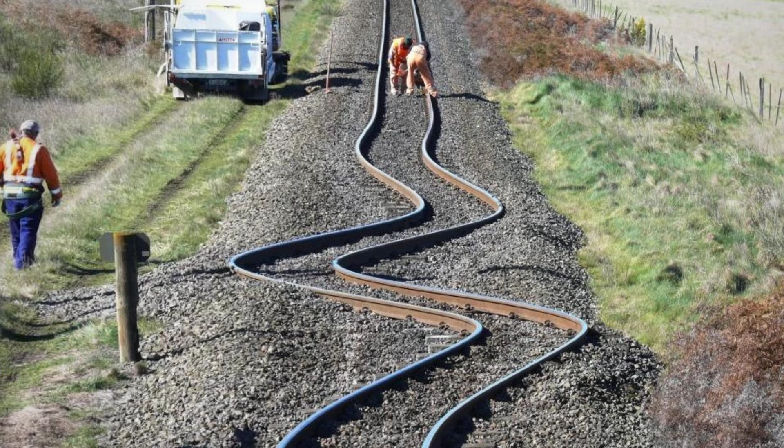Right now, the main railway line between Milan and Lecce is running at reduced speed over a track that deformed by 10 centimeters during the crisis. The A14 motorway connecting Bologna to Taranto is carrying traffic on a single lane in each direction.

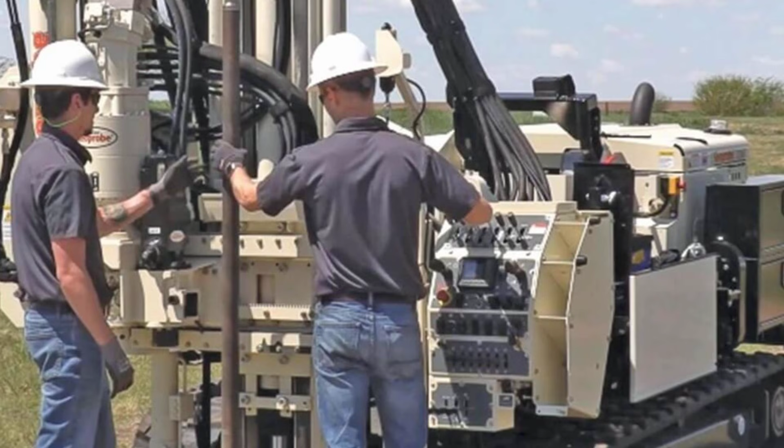And the €40 million project designed to prevent this from happening again has not started. Because after the April reactivation revealed the slope is deeper than anyone had measured, the project needs to be redesigned from scratch before a meter of it is built.

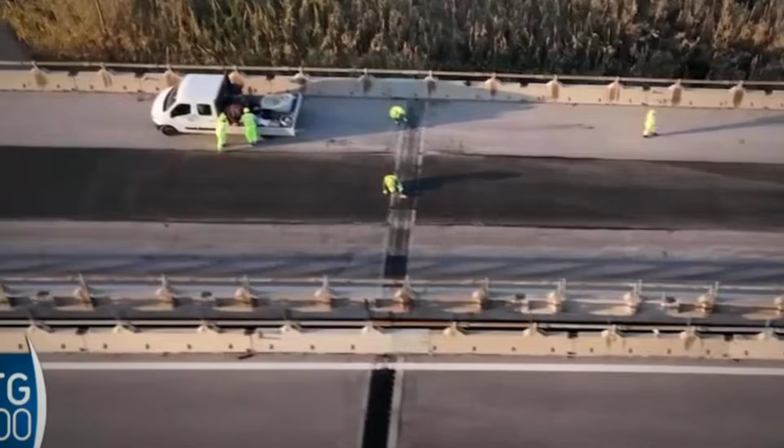The government called it a record time response. Matteo Salvini visited Petacciato, thanked the technicians and workers who had restored Statale, motorway and railway faster than anyone expected. Over 100 people and 40 vehicles had worked through the night.

The A14 reopened April 9th with a single lane. The railway followed the morning after. In 4 days, a corridor that had been severed had a pulse again.

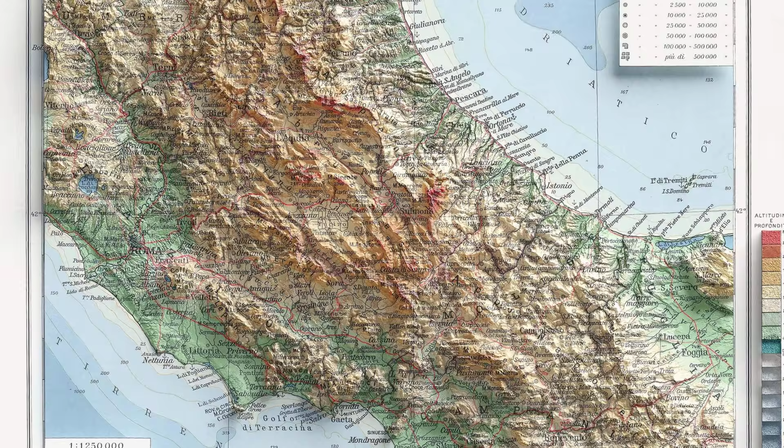The Adriatic corridor is not one infrastructure the way most people picture it. It is 3: motorway, railway, and national road, running side by side through a coastal hillside in Molise that has been moving intermittently for over a century. When the slope reactivates, all 3 close simultaneously. That is not a coincidence of geography.

It is the geography. And the corridor is open right now on the condition that the slope beneath it does not accelerate. The monitoring sensors are measuring it in real time. If the readings change, the closures are automatic.

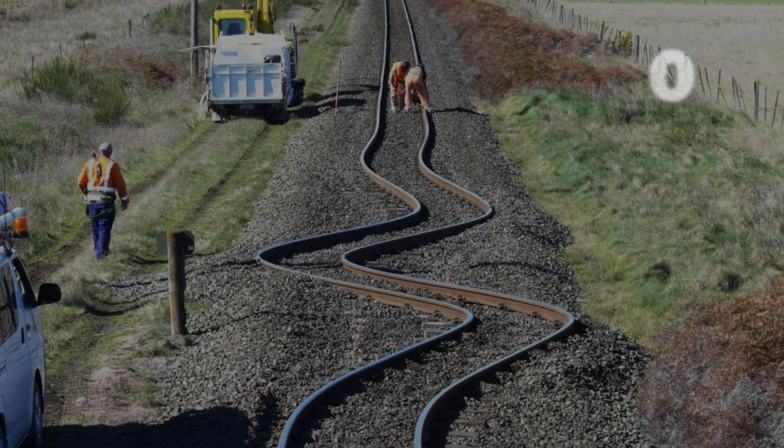Nicola Casagli, president of OGS and one of Italy's foremost landslide scientists, described what the sensors had shown during the crisis: a horizontal displacement of 1.5 meters in the lower sector, where the motorway and railway run, roughly the distance from the driver's seat to the passenger door of a parked car. Vertical movement toward the town reached almost 2 meters.

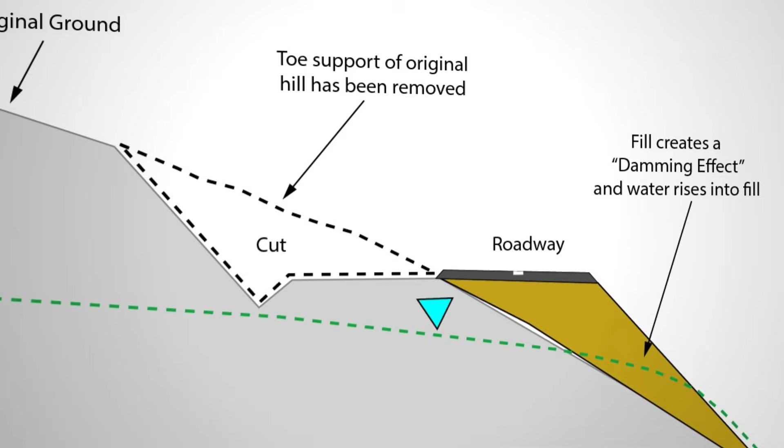And Casagli said something in Petacciato's town hall that changes how this whole story reads. The slope had proved deeper than previously understood. The €40 million mitigation project would need to be aggiornato e riorientato, updated and reoriented, not because it was poorly designed, but because the April reactivation revealed a landslide the pre-existing geological models had not fully captured.

Domenico Racconati, 53, from Bisceglie, has been missing since the Trigno Bridge collapsed on April 2nd. Only his license plate was recovered, snagged on vegetation near a bridge pillar, found on April 3rd. His daughter Angelica asked the state not to stop looking.

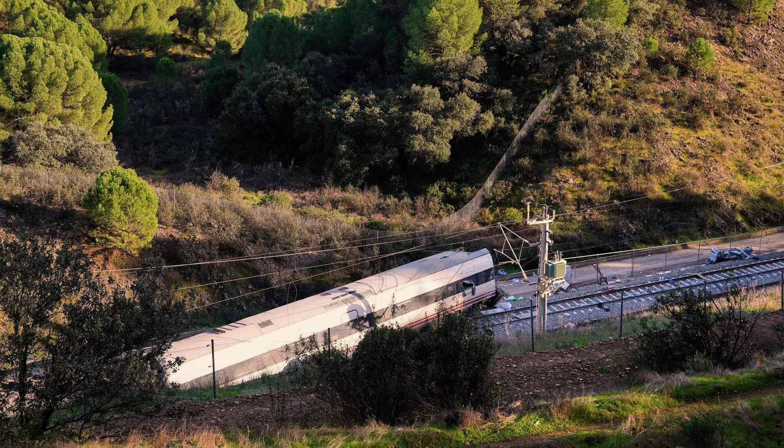On April 7th, at around 9:30 in the morning, the sensors on the A14 embankment registered anomalous movement. The motorway closed first. Within hours, the railway followed. The track monitors had recorded 10 centimeters of deformation. The SS-16 came down simultaneously. The entire corridor went dark in less than 24 hours.

Cyclone Erminio had deposited more than 200 millimeters of rain in the 24 hours before that. Roughly 3 months of average rainfall in a single day. The slope did not fail because of extraordinary rainfall. It reactivated because accumulated water pressure in the clay layers finally exceeded the resistance of the ground. That is what Petacciato does. It has done it at least 9 times in a century.

The landslide front runs for approximately 2 kilometers. Its depth ranges from 25 meters in the upper sector to 80 meters or more in the lower zone. The height of a 25-story building pressing down through the hillside toward the Adriatic.

The €50 million state of emergency declared April 9th covered Abruzzo, Molise, Basilicata, and Puglia. Against that, the €40 million mitigation project, announced by the Molise regional government in 2021 as imminent, tendered in December 2025. Not yet awarded when the slope moved.

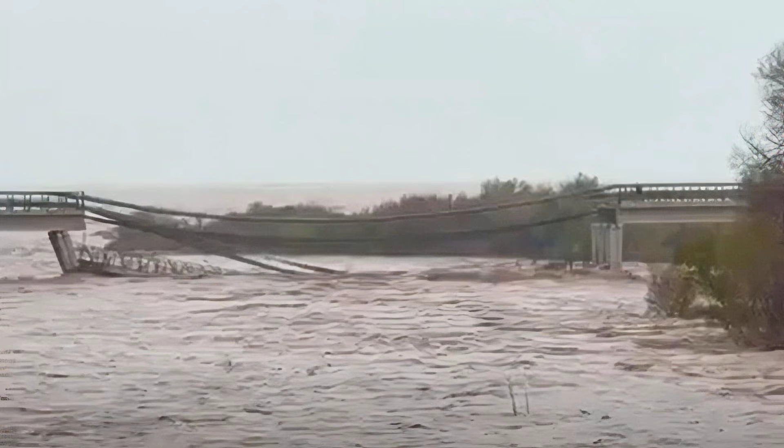The Trigno Bridge will take at least 7 to 8 months to rebuild, according to Fabio Ciciliano, head of civil protection, probably longer. Salvini said it would be restored by the end of the year. He did not specify which year.

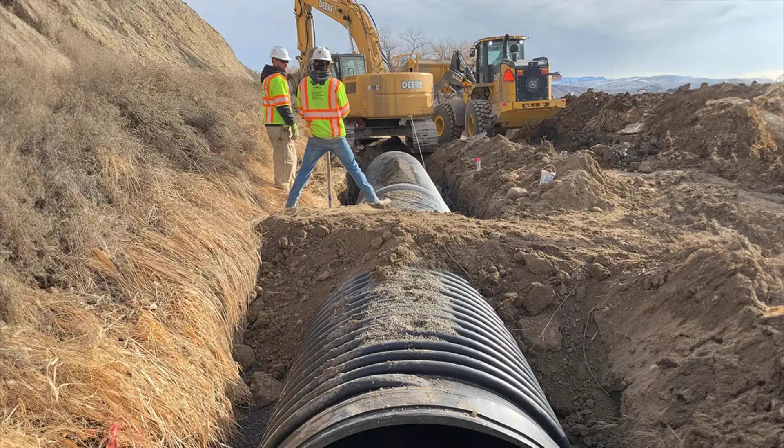Once you understand what the 40 million euros were actually designed to do, the problem stops sounding like a funding gap and starts sounding like a physical limit. The project is a specification produced by Technital, a firm from Verona. 12 large diameter drainage wells connected to horizontal and vertical drains bored to depths of several dozen meters.

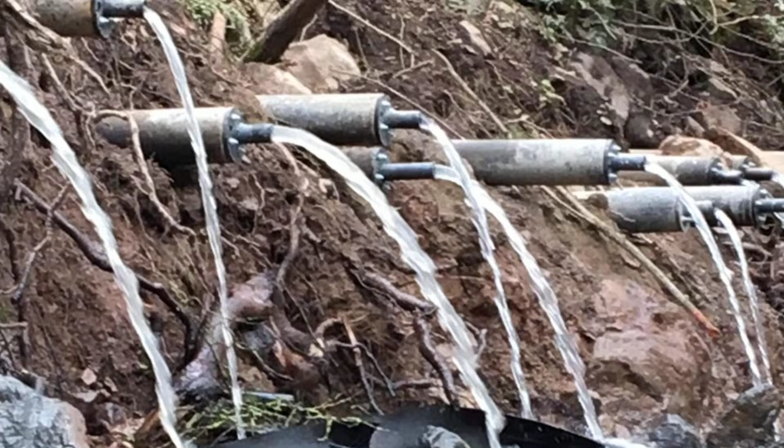Simone Venturini, technical director, described the logic in precise terms. Togliere il lubrificante, remove the lubricant, lower the water table, reduce interstitial pressure, and the clays recover resistance. The wells do not stop the slope. They extend the interval between reactivations. That is what the project promises, not resolution, but time.

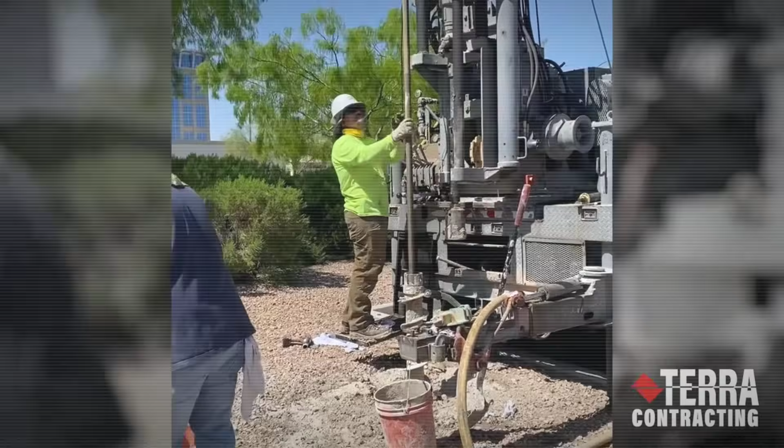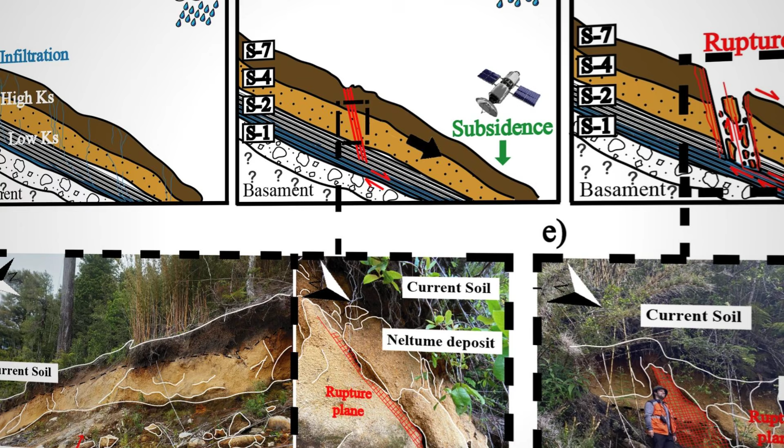But the technical report admits that the wells will not reach the deepest slip surface. The shear zone at Petacciato runs from 25 meters near the top to 60 or 80 meters at the base of the lower sector, where the railway and motorway sit. The drainage wells are designed to intercept the shallower and intermediate aquifer layers.

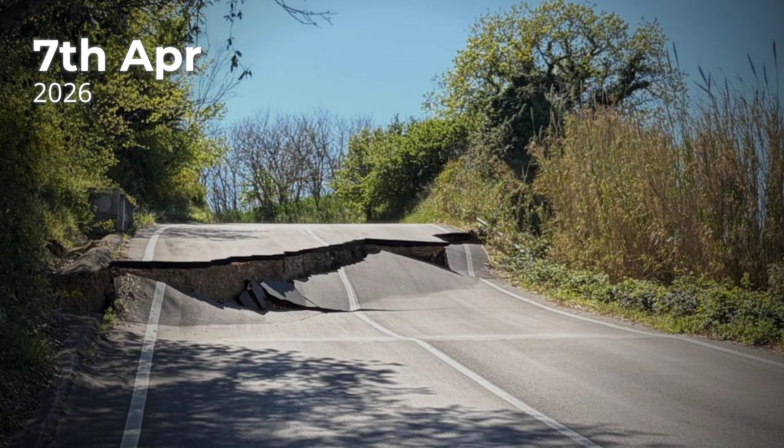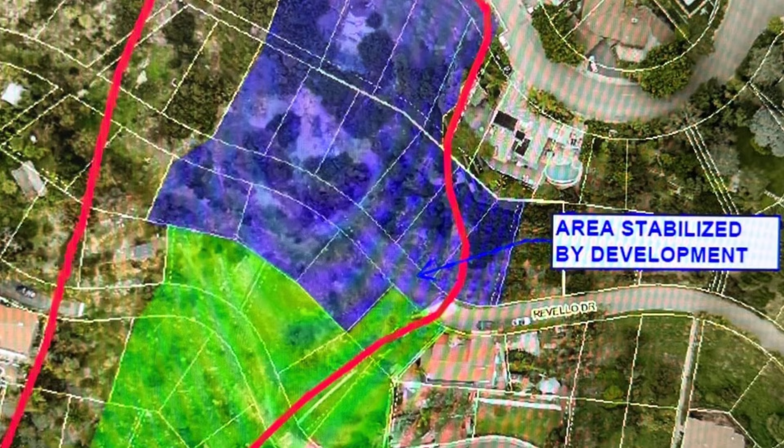The primary slip surface, the one that generated the 1.5 meter horizontal displacement in April 2026, lies below the design depth. So the 40 million euros were never a permanent fix. They were designed to buy time on a corridor that cannot be rerouted. And now, because the April reactivation revealed the slope is deeper than the project had modeled, the project itself needs to be revised before any of it is built.

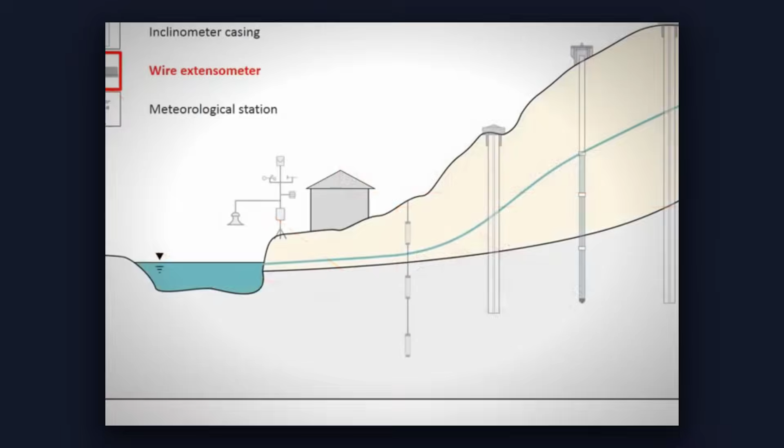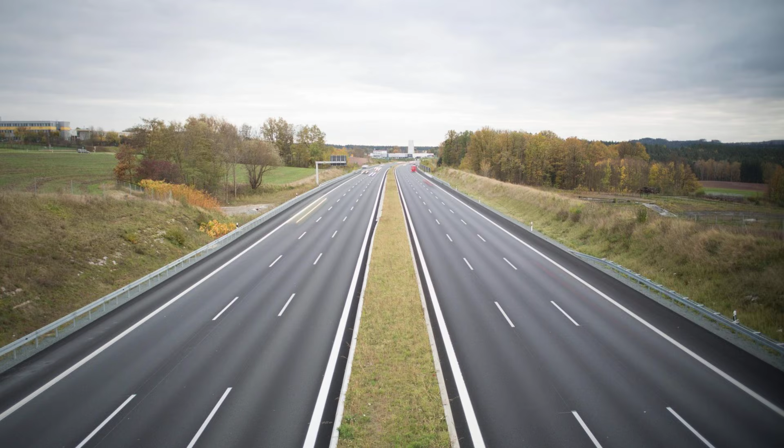The monitoring network at Petacciato, inclinometers, piezometers, surface displacement sensors, had been installed because the slope was known to be active. When the rains came, it caught the movement before visible damage appeared. The closure protocols fired automatically. The corridor was cleared before the displacement reached its worst point.

Casagli said the 9 previous reactivations were not monitored like this one. The April dataset is the most precise picture anyone has ever had of how this landslide moves. That monitoring system worked exactly as it was designed to work. And in working correctly, it produced data that makes the redesigned project more complex, not less.

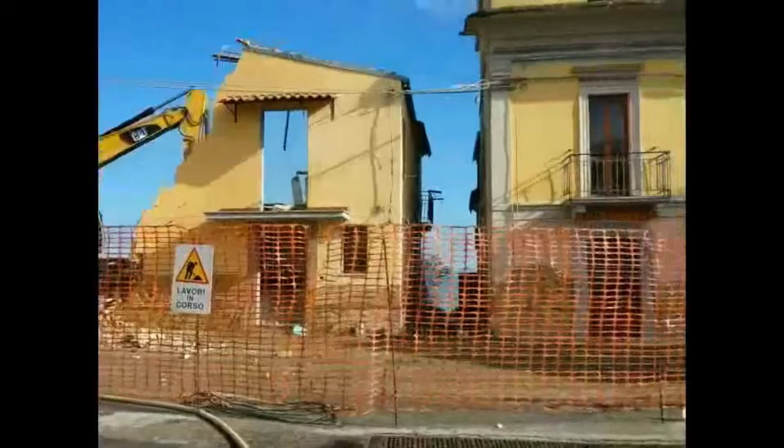The Petacciato landslide reactivated at least 9 times in 100 years. Each time, the corridor reopened. In March 2015, the last major reactivation before April 2026, 3 homes in the Borgo Vecchio were demolished because the ground beneath them had moved too far to allow occupation. The old municipal building, the Vecchio Municipio, sustained structural damage severe enough to require immediate closure.

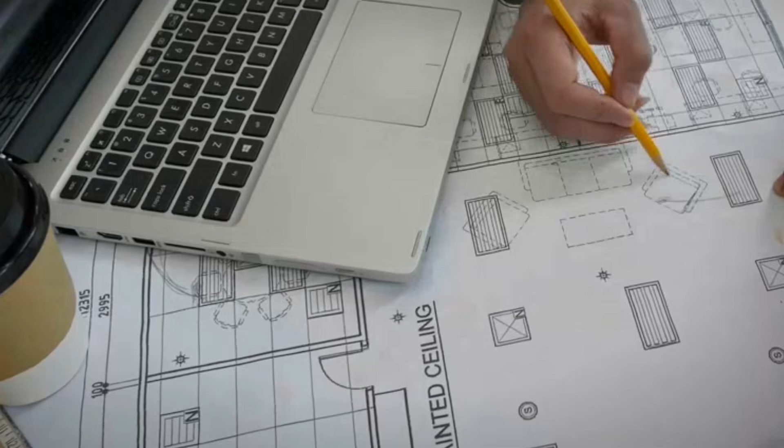11 years later, in April 2026, that building was still standing with those damage marks on its facade, unrepaired, still tagged as compromised. A physical record of where the slope had been in 2015, while the plans to prevent the next reactivation were written, revised, announced, and eventually published as a tender in December 2025.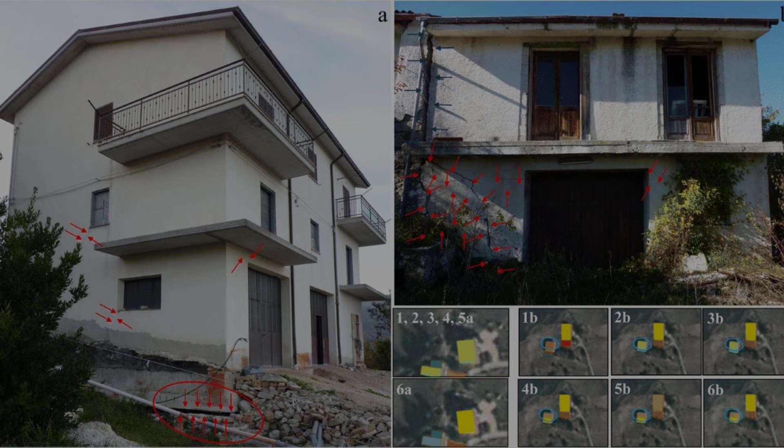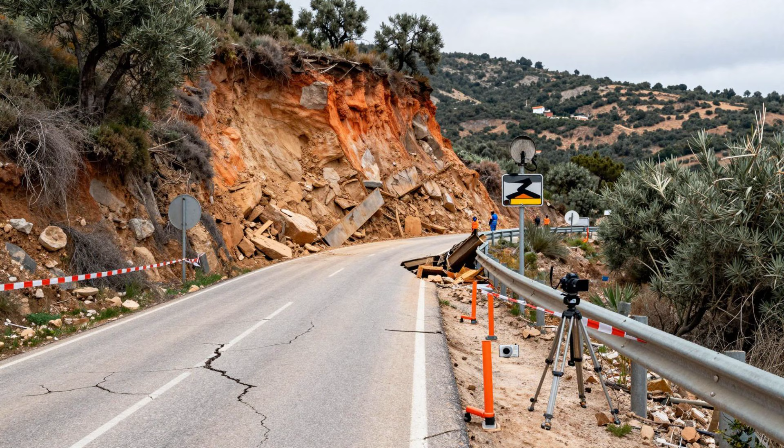The Corte dei Conti, Italy's public auditing authority, tracks the average gap between project announcement and construction completion across the national landslide risk portfolio. Its figure: 5 years. At Petacciato, the gap between the 2021 announcement and the December 2025 tender was 4 years. The 2026 reactivation happened inside that window. Inside the average the national auditor had already documented as typical for exactly this kind of project.

Antonello Fiore, president of SIGEA, the Italian Society of Environmental Geology, put it plainly. The administrative and planning system is structurally incapable of keeping pace with the speed at which disasters manifest. The case of Petacciato, he said, is emblematic. The risk was known. The funds were allocated. The work was not done in time.

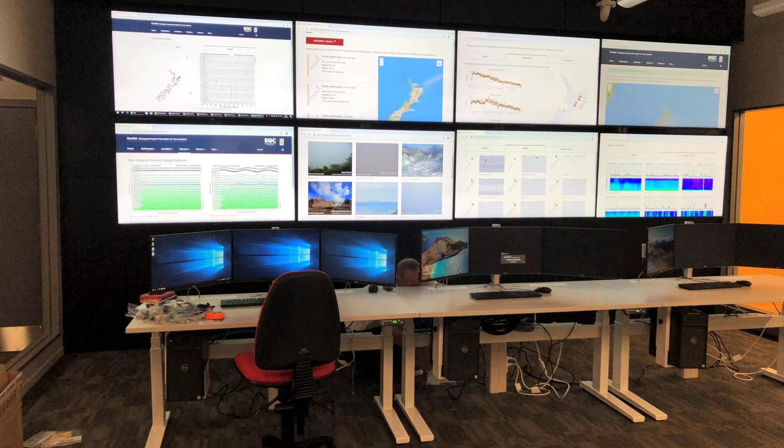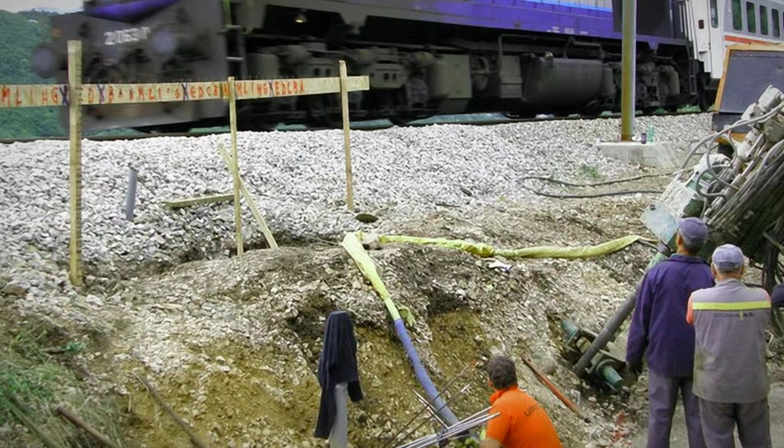The image to hold is simple. A train moving slowly on the morning of April 10th on a track that had deformed in the days before. Moving because the sensors were reading within acceptable thresholds. Moving precisely because those thresholds were being watched in real time by a system that had worked exactly as designed, and that, in working exactly as designed, had produced data requiring the intervention beneath that track to be rebuilt from scratch before construction begins.

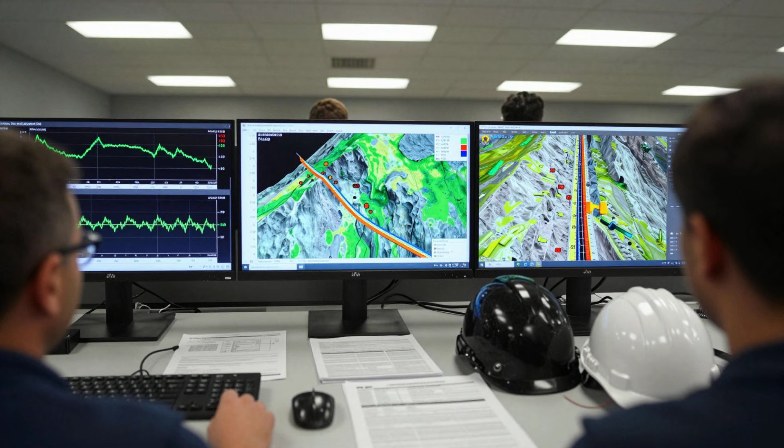There is a particular kind of corridor that a national transport axis crossing a century-old active landslide produces, one where the emergency response activates correctly. The monitoring functions as intended, the roads reopen in days. And the condition for all of it staying open is that the geology cooperates with the timeline the procurement system runs on. The Petacciato slope is still there.

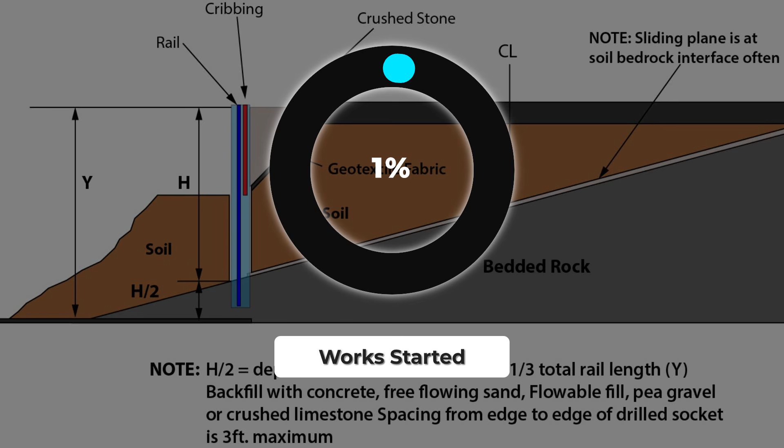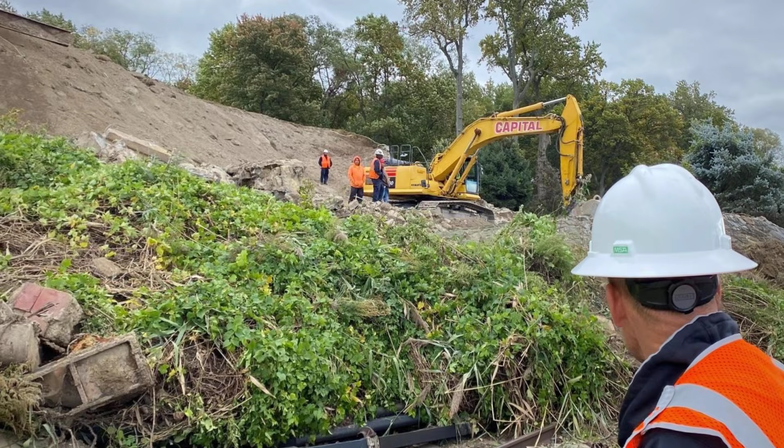The mitigation project must be redesigned using data that this reactivation produced. The works have not started. The Ferrovia Adriatica is open. Trains pass at reduced speed on a track that moves with the landslide. The condition for keeping the line running is that the slope does not accelerate. The slope has not stopped.